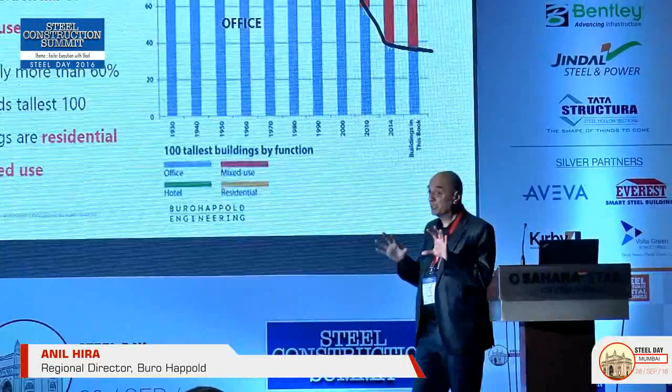The next big shift, and this does affect steel, is that early, before 1990, 10% of the world's tallest buildings were residential and mixed use, whereas the rest were office. And now, more than 60% of the 100 tallest buildings are residential. And what does that mean?

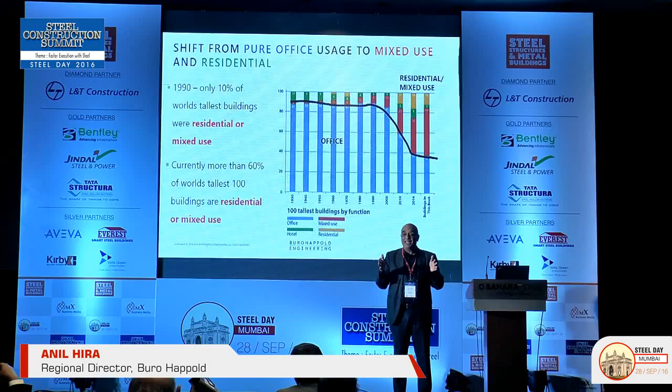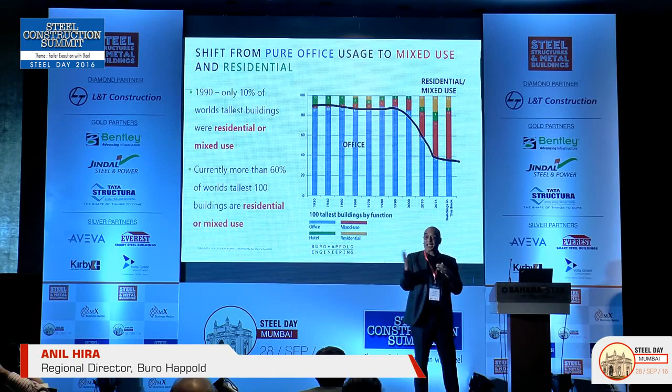Residential tends to be small spans. We want to minimise the floor-to-floor heights. And so that straight away has an impact on whether you use steel or concrete. I'm not saying which is the better answer, but it certainly does influence which way you go.

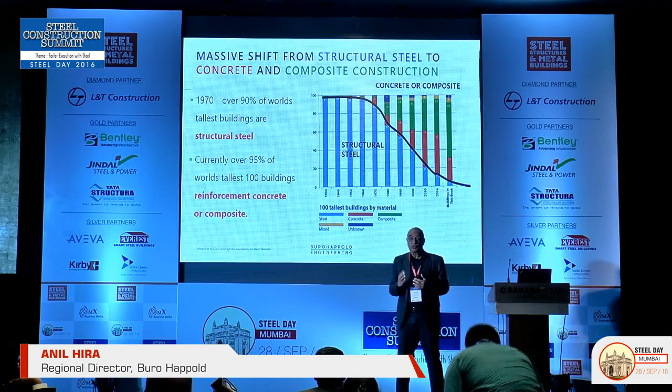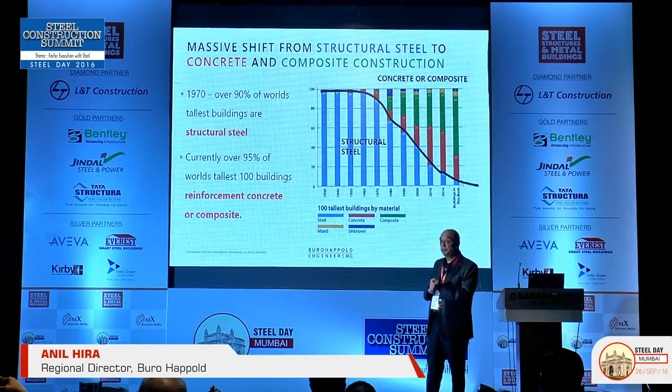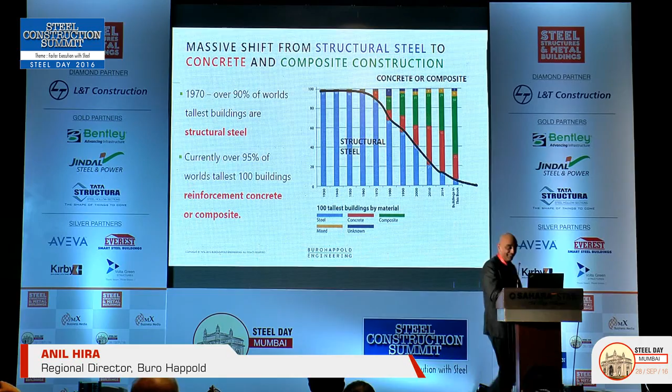And the third one is the massive shift from structural steel to concrete in tall buildings here. Before 1970, over 90% of the world's 100 tallest buildings were primarily structural steel, and now over 95% of the tallest buildings in the world are concrete and composite. And we shouldn't forget that. There are many reasons for that.

Well, why? A couple of things that I can think of is that concrete strengths, even in my career, have gone up from something like 40 megapascal to 140 megapascal. In the country where I come from, Australia, 140 megapascal is readily available, and I've used it for 60, 70, 80, 90-story buildings.

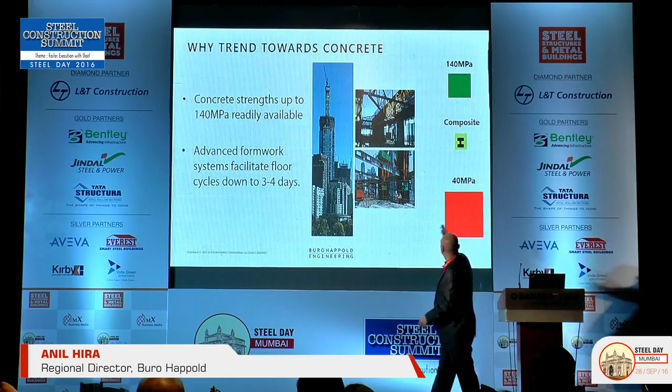And so this gives you a nice layman's diagram: this is what we needed 50, 60 years ago, the red column. Now we can get away with the green column. And composite, well, we've still got a smaller one, but I'm just saying relatively, concrete is improving dramatically.

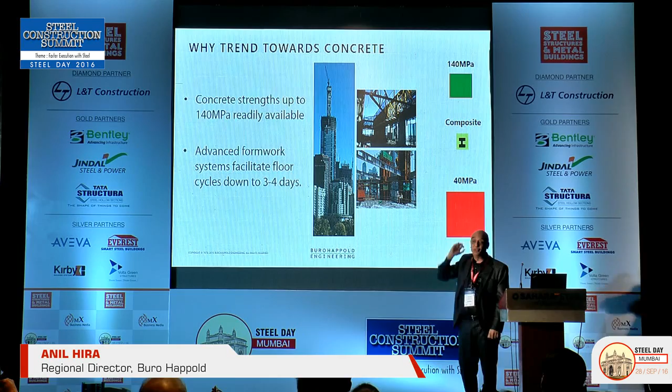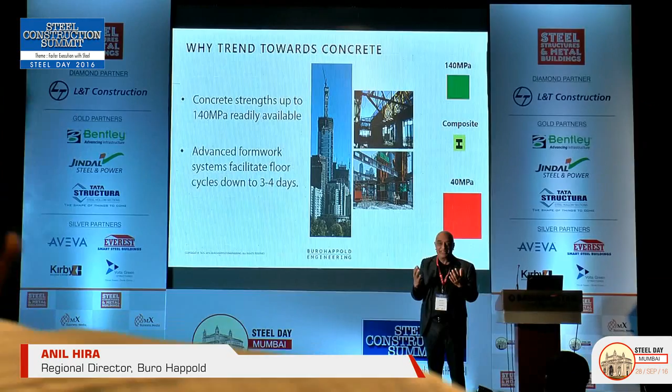And the second big trend in the world is advanced formwork systems. We can have buildings that now climb up very, very quickly. The cores can go up quickly. This particular building, the tallest building in Australia, which I was involved in, that core was going up at 3 days per floor, 6 days double floor. And that's why it's so far advanced.

The reason why it's so far advanced is that we want to get rid of that $1 million advanced formwork, get it off the site and get it onto the next building. And same with the perimeter system. There's only 20 workers on this project doing this infrastructure. The whole perimeter formwork was jacked up on hydraulic lifts, and we're getting 4-day cycles, if not 3.5-day cycles. So they're the two trends.

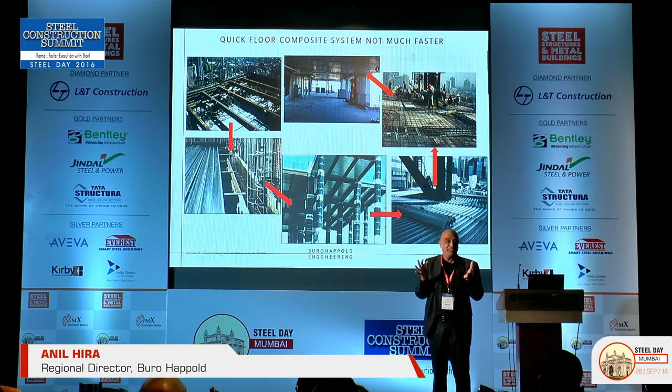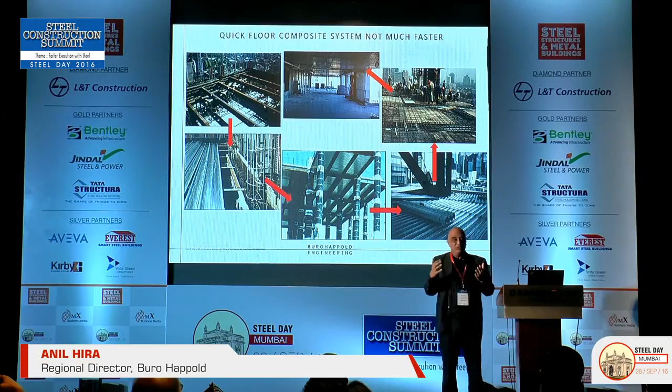So our traditional composite slab, which traditionally is very, very quick, is not that much faster. We should be able to do it in 3 to 4 days. That depends on a lot of factors such as craneage, getting all those members up. So when we talk about structural steel as fast construction, it's only going to be as good as its weakest link, which includes fabrication, transportation, craneage, etc.

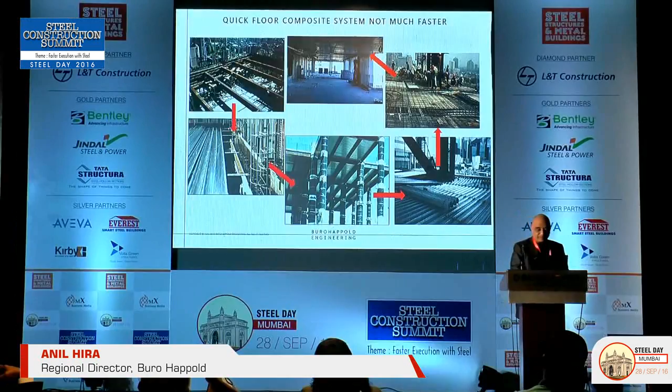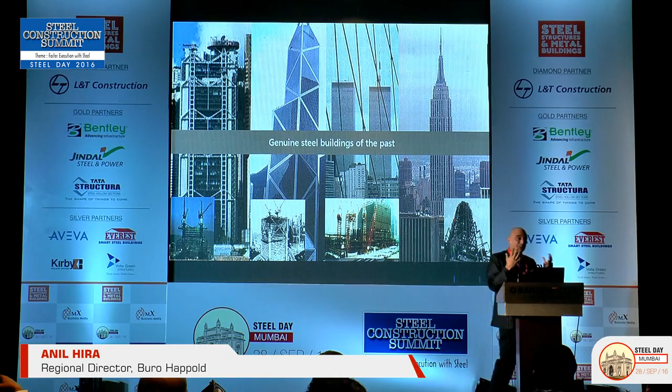So, what is the trend? What's happening now? Before it was structural steel, well, now the trend is composite. This is what was happening 30, 40, 50 years ago, and one of the speakers in the other room just before lunch talked about the Twin Towers, how resilient it was against the events of 9/11.

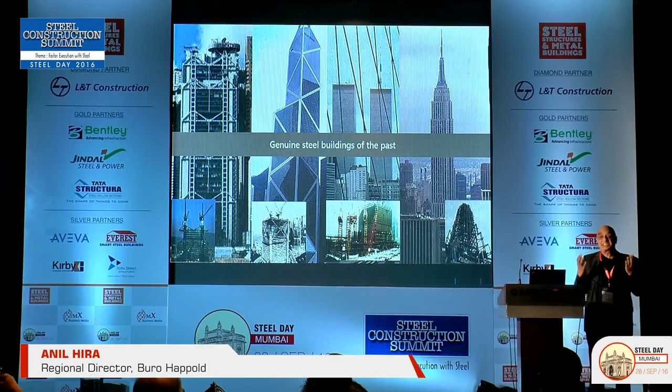Why did the buildings stay up so long? We keep talking about why the buildings came down. I always ask myself, and I know the reason, because I know the structural system, but we should be asking the question, why it stayed up for 1 or 2 hours and let most of the people get out of the building. And there was a lot of robustness to the structure, but it was pure structural steel.

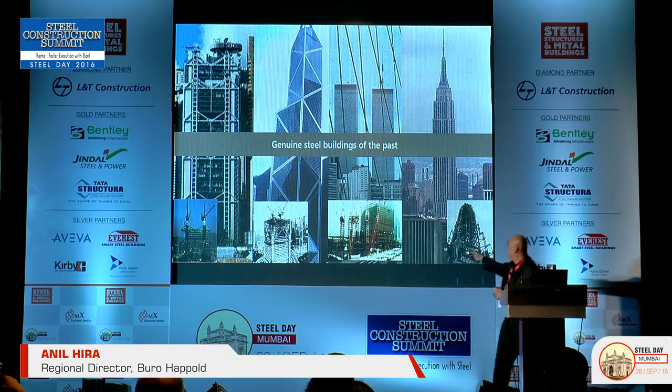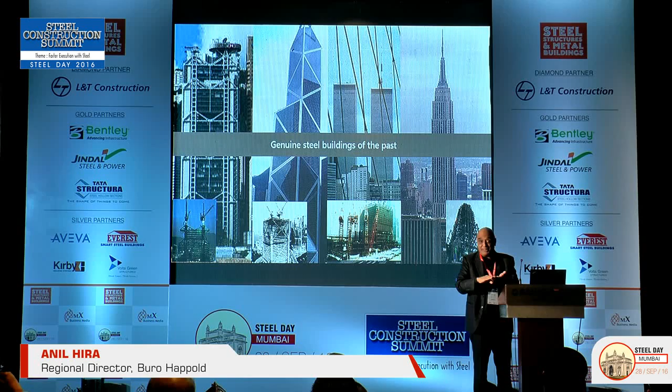So, the present 5 tallest buildings in the world, well, they're all composite, but dominated by concrete. And we shouldn't forget that, it's concrete. Essentially, Burj Khalifa is concrete. So I'm not trying to paint a bleak picture here, I'm just setting the scene.

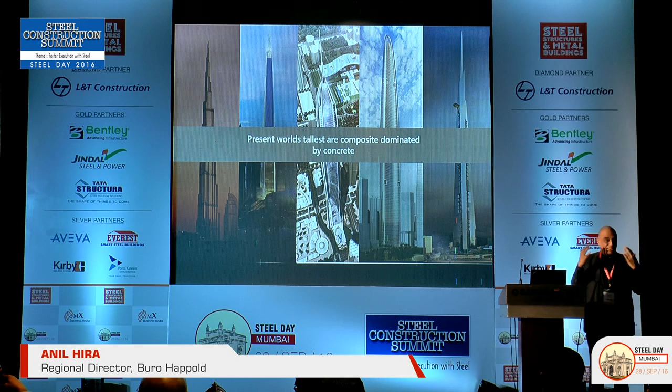And what that means in terms of our steel industry, we need to address how to get more competitive. And we have to address all the parameters, because certainly the owners of these 5 buildings, they've selected concrete. And the reason why is it is more economical, no doubt about it.

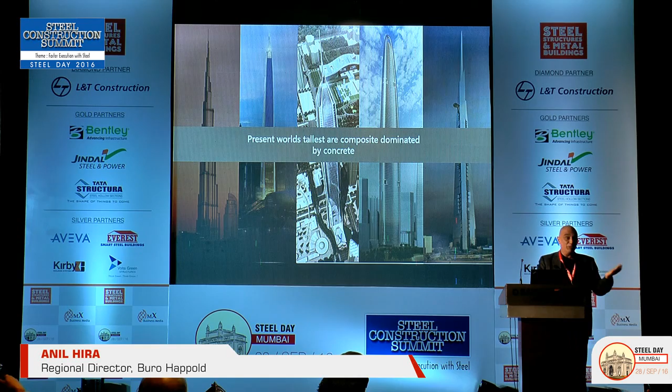So I want to show you some examples of projects that my company and I have been involved in, just to explain why we use steel in parts of the building. This particular project, I was a client's engineer. I wasn't the designer, but I was a client's representative. Dictated the way we want to go. It's called the CMA Tower in Riyadh, Saudi Arabia.

And you can see the columns are going in and out to form a crystal shape. So as soon as the columns go in and out, and Newton's law, physics, the force has to go down, but the columns going in, there's going to be lateral forces. And the lateral forces are either tension or compression. Obviously, when it's tension, we need to use steel.

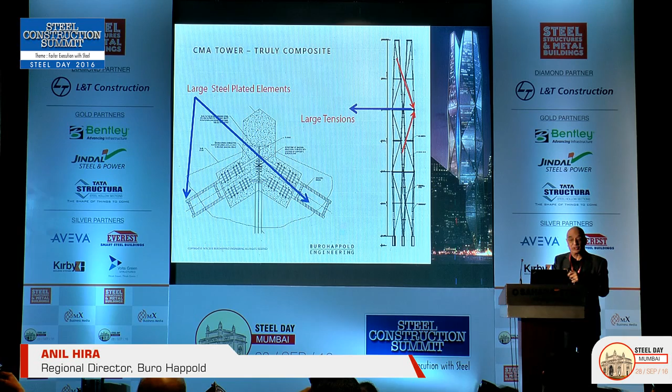And so there were 2 things, the columns were concrete-filled steel tube columns, and there was lots of structural steel in there in terms of horizontal elements that were pulling the columns in to make sure that they don't collapse. So that gives you some vision there of large concrete-filled steel tube columns.

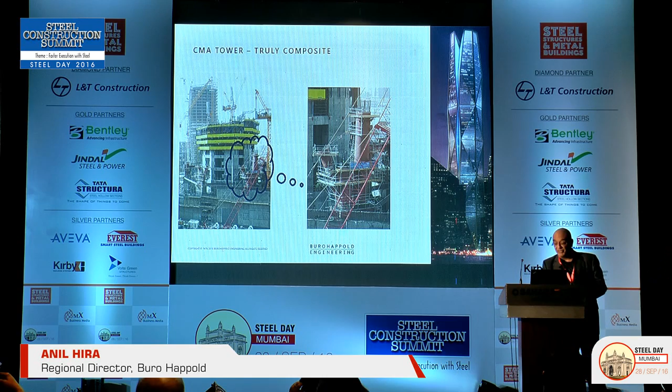And I could give you a whole lecture on concrete-filled steel tube columns, because for a concrete-filled steel tube column, the compressive strength of it is higher than the strength of the concrete plus the strength of the steel, because of the triaxial effect. And for the people that have done soil mechanics, you'll tend to understand why, but I'm not going to give you a lecture here now. But they are very, very efficient, and certainly being applied in North America and Australia.

Very, very impressive. It's great because you can progress the construction without the concrete in the tube for a certain distance, take the construction load, and you can fill the steel tube with high-strength concrete during a non-critical period, so that the building keeps progressing.

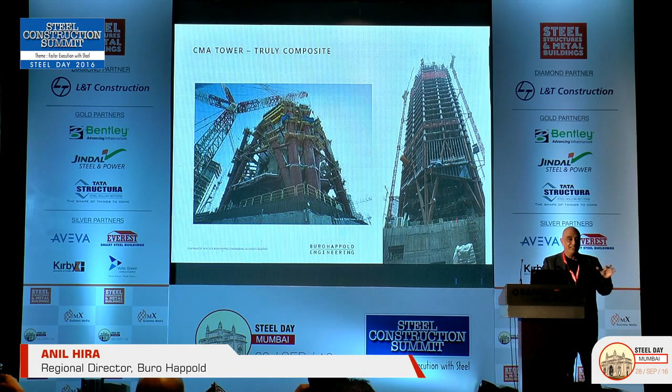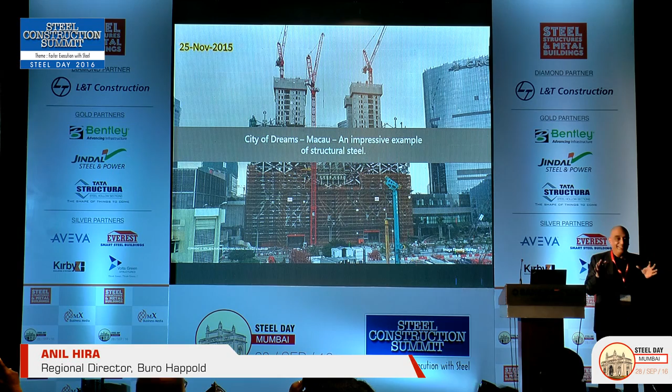This project, another reason why we want to use steel here, well, it's just impossible to use concrete. A typical Zaha Hadid design, and for people that don't know, Zaha Hadid unfortunately passed away just this year. She never liked vertical columns and straight elements. That's a bit of a challenge for our structural engineers. But this was the project, and what you see there is the structural skeleton.

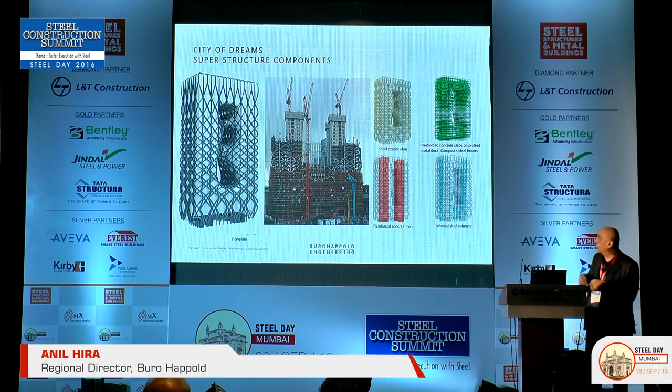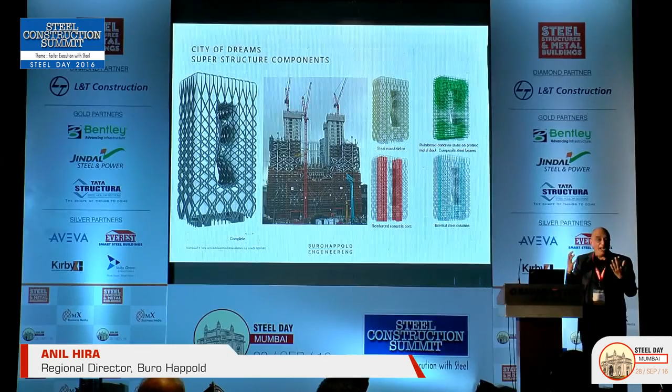It is structural. There are no perimeter columns. There's a concrete core in the middle. Externally, what you see is the structure. So it's almost impossible to have any other material except steel. And why have we got such a complex tower? Because it's going to be a very, very expensive tower. If anyone tries to tell me it's going to be a cheap tower or an affordable tower, obviously you're joking.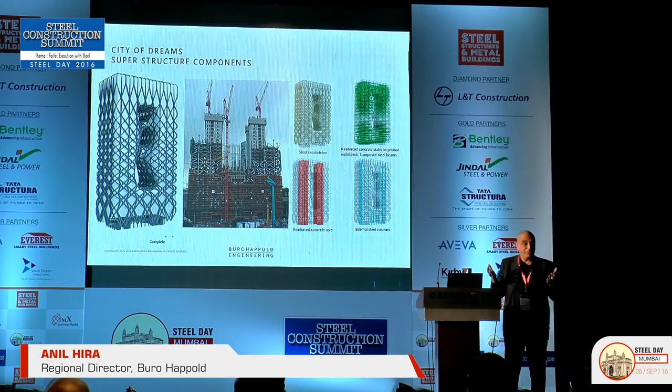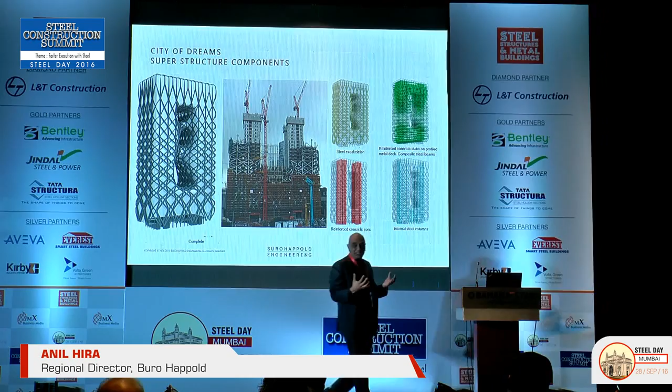But there's something that's based over here that generates a lot of money. It's called a casino. And it's a hotel above a casino, and the cost is peanuts compared with the profit that they make out of the casino to fund this hotel. And so, hence the reason why it's so complex. It's going to be an architectural feature, and it's going to dominate the Macau skyline.

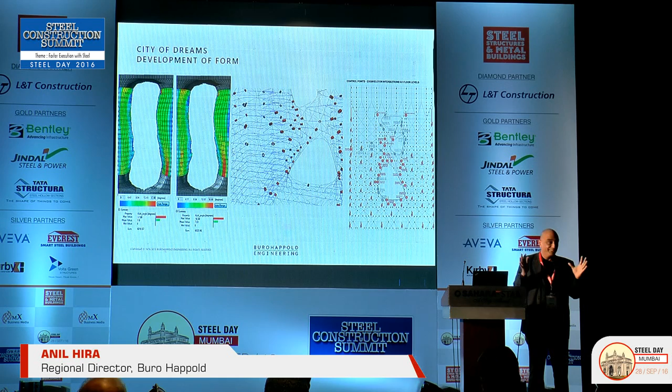The only reason we can do this now, and hence why we can be creative with our structural steel, is because we've got digital engineering. From geometry, we can convert to finite element models with the joints and analyze it all at the press of a button, as long as we program it. It would be almost impossible to design this 10, 20 years ago. We can do this now because of digital engineering.

I was going to, let's just see if I can show a video. It's not going to work, I don't think.

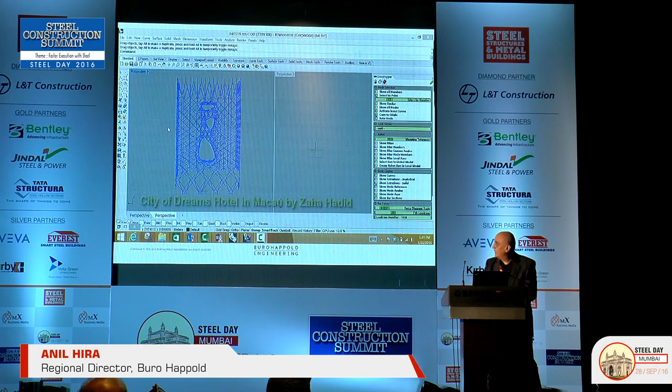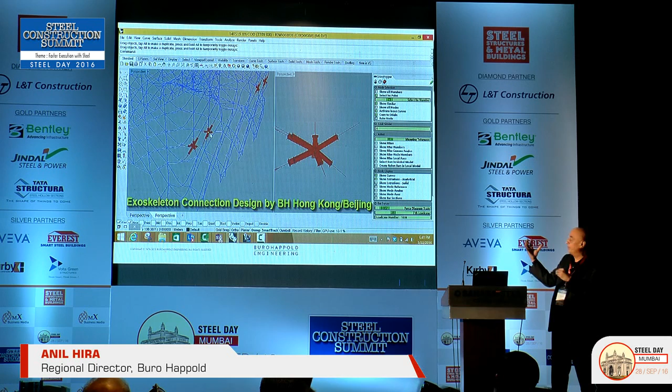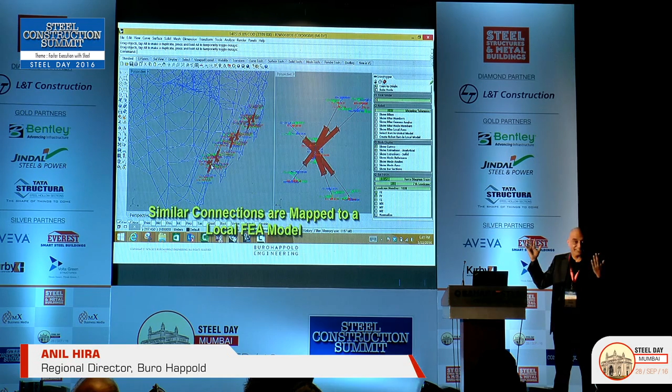Yes, it is. So this particular project, you get the geometry from the architect, and automatically we can go from the geometry, using Grasshopper and Rhino, into a finite element model, and then analyze it for all the different load cases at the click of a button. So even if the geometry changed, we can automate the whole process, which only takes a few hours to run, to basically analyze all the joints.

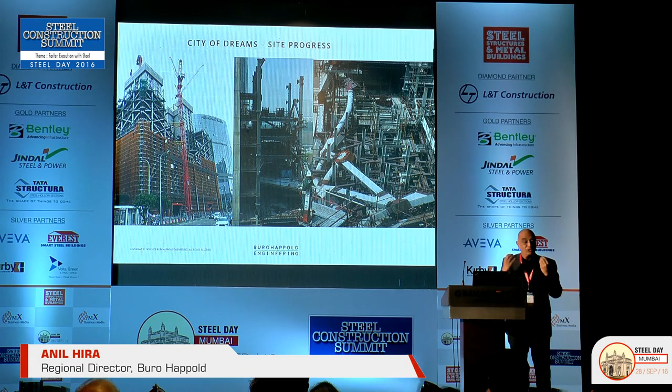So just some pictures of the complexity, and just shows you the versatility of structural steel. Because we can define it now through digital engineering, it's so easy for the fabricator, so easy for the structural engineer, because we can define it through digital engineering.

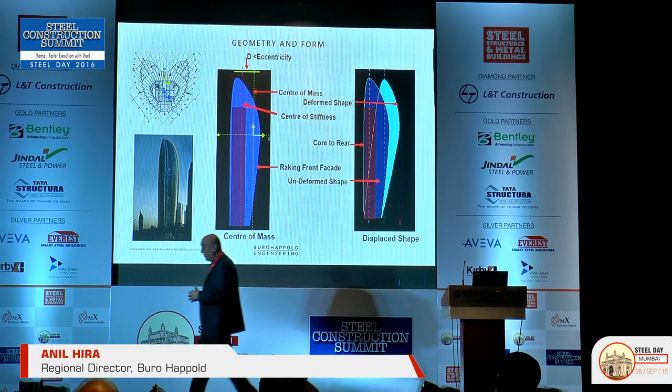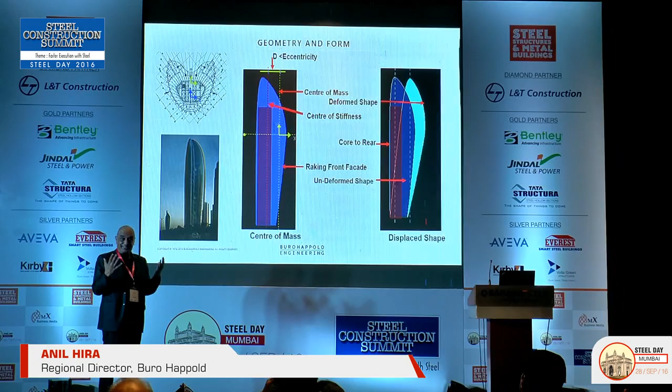The National Bank of Kuwait, that's another interesting project, very, very expensive. The reason why it's very expensive is because it's the headquarters for the National Bank, and they can afford to pay a little bit of penalty to market their building as that iconic structure that symbolises the bank.

And this whole building, for the structural engineers, is highly eccentric. So the building wants to tilt over, the stiffness compared to the centre of mass. And of course it's concrete, the core is concrete, so it wants to continue to creep, moving over time, and so we needed to have structural steel to minimise that tilt and to predetermine some presets.

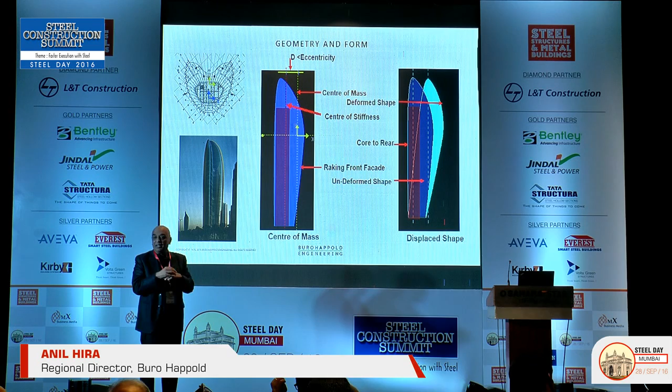So we tilt the building the other way, so over 30 years it will not straighten, but it will tilt the other way, but we're compensating half of the deflections. So quite complex, but we had to use structural steel to minimise that tilt.

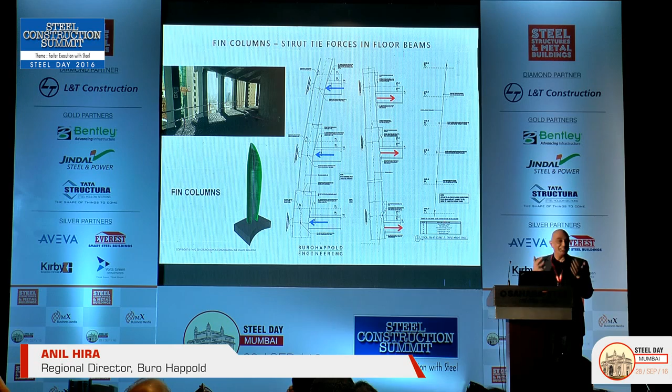Because the columns are curving, obviously push-pull forces, when it's curving downwards, you've got tensions on the slab, and so the whole thing, the out-of-plane forces were all taken by structural steel within the floor frame. And so structural steel was the only answer. There was no other option.

Just to give you some more images of the floor plate, composite with the steel tube columns. So everything is structural steel except for the floor slab and the concrete core. Some more images. In fact, this is about 1.5 years out of date now. The building is almost topped off.

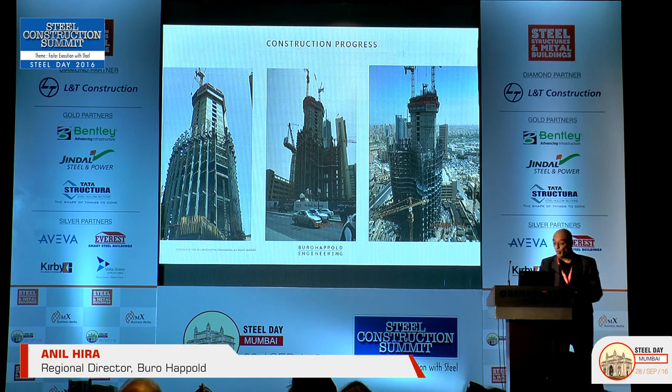The next project, very quickly, is a project that I was involved in nearly 35 years ago. It's called Market City. And I only got one slide here, but why did we use structural steel here? The reason why we had structural steel is that it's a very complex project.

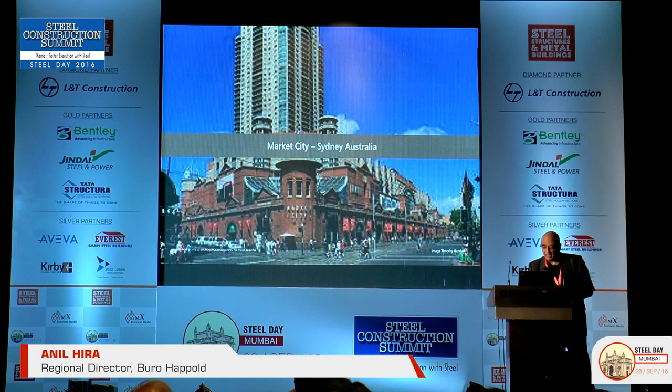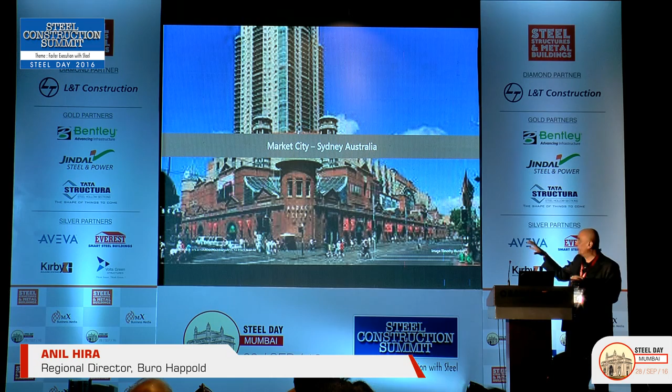If I go to the previous slide, there's a market, movie theatres, shopping centre, vegetable market, fish market, meat market, in the basement areas. Very, very complex, and then the building on top of that. And so we needed to build this very quickly. These are the days when the interest rates in Australia were 18%, and the developer wanted to get this built as quick as possible.

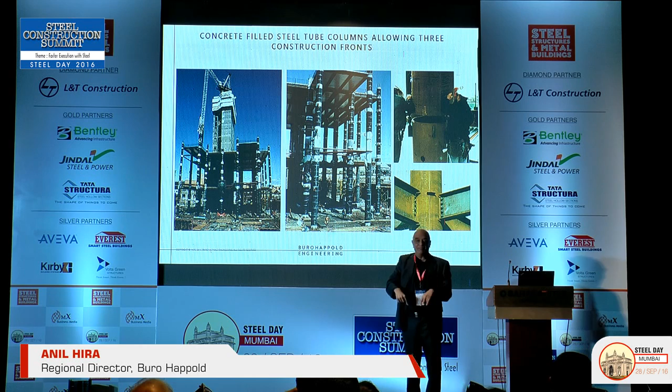So we wanted to get off the foundations, steel tube columns, quickly up, and so you can see the concrete core is shooting up, virtually we go 20 stories above the floor, and we want to get a working platform where you start your typical floors. So there are 3 construction fronts, one right at the top, one in the middle, and one at the base. Theoretically, everything gets finished on the same day.

And so the whole building was completed in virtually 2 years, whereas if you started from the base and worked your way up, 3 to 4 years. Once again, only possible because of structural steel. That was the only answer.

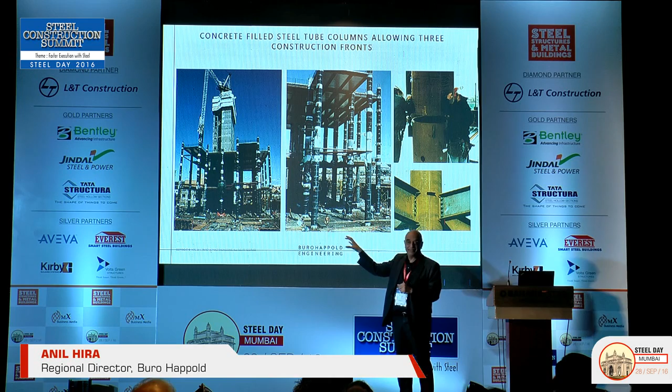Okay, getting pushed here, 5 minutes.

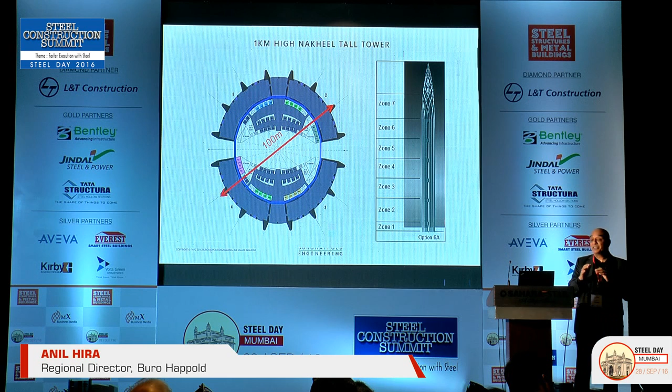Okay, Nakheel 1 kilometre high tower. This is a project in Dubai, I've got the title there, Victim of Global Financial Crisis. It didn't get built, but that's only half truth. The foundations did get built. About 170 million US dollars worth of foundation is buried under the sand in Dubai. And I designed the foundations, I'm proud of that.

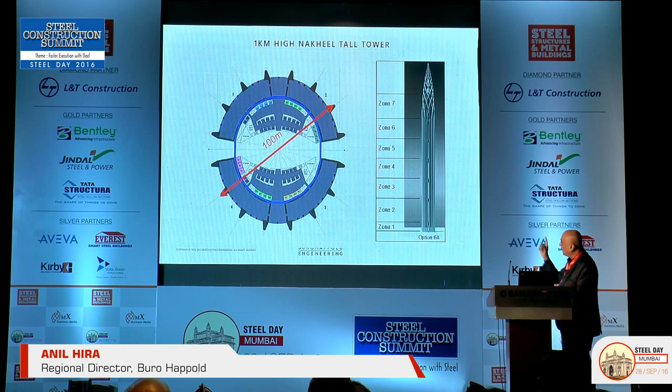100 percent concrete structure again. However, lots of steel. And just some of the examples. Because the spans between the mega columns are 22 metres, we had internal columns in between the 2 big black blobs, and that had to get transferred every zone where you've got this band beam here.

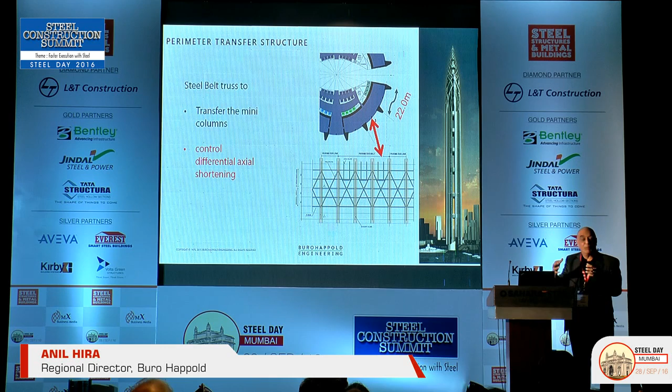And at that band we had steel truss. And the reason why it's steel is that the concrete just kept on going, and the steel elements were built in non-critical periods. So lots of structural steel there. Secondly, when the wind blows, there were 4 quadrants and they were connected by these link beams.

And those link beams had to be in steel, simply because we're trying to transfer 200,000 kilonewtons. If you don't understand what 200,000 kilonewtons is, it's equal to a small ship. Now the force that goes across that, and concrete, well, the shear forces are so excessive that we have to have steel. And so tons and tons of steel in all those link beams.

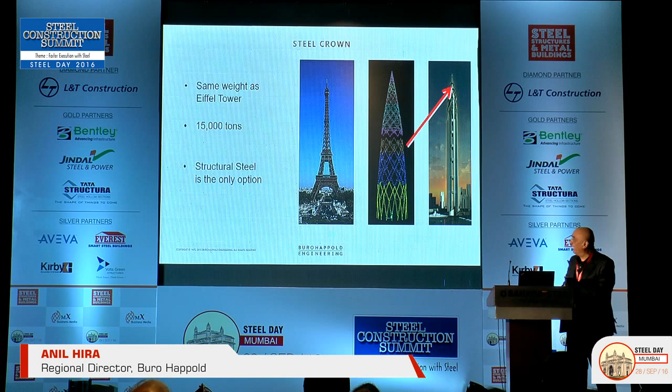The top feature, even though it looks small, that top feature, the roof feature, is the same weight as the Eiffel Tower and virtually at the same height as the Eiffel Tower. It's 1 kilometre high. You can see the top 200 to 300 metres was structural steel. And so once again, structural steel is the only answer because of the geometry and it will minimise the weight.

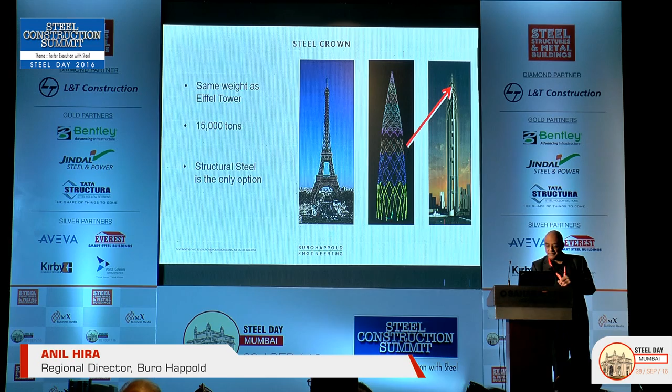And then lastly on the Nakheel Tower, in these zones there's plant rooms that span across that whole central void, 3 or 4 stories of it, and that had to be structural steel. And that was dictated not by weight; it was all to do with buildability. How do you build that platform up in the air?

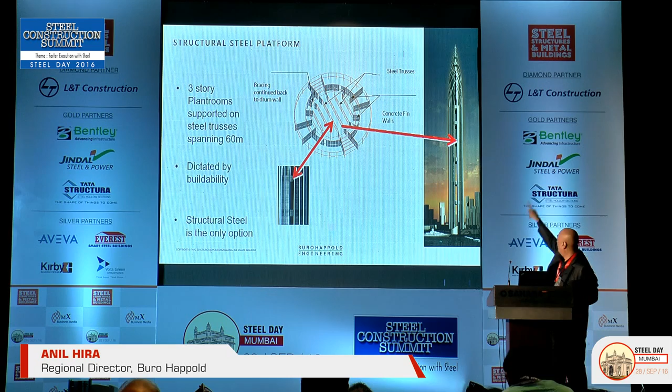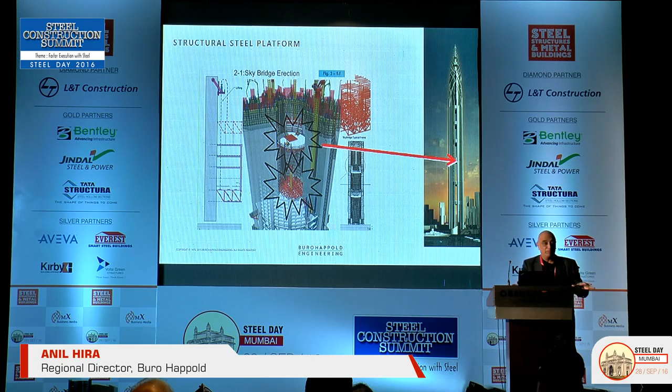So the next diagram shows you that the whole structural steel framework was all constructed at the base, and then it was jacked up, a bit like the previous slide. Top-down construction, the whole thing was built in the base, and it was all jacked up to build those platforms. The future.

I've sort of painted a bleak picture for steel, but you can see that we do have lots of steel application. But where are we heading? Well, we go back to Henry Ford, building your cars, where one person does one activity, but does a damn good job of that one activity. Becomes very, very good at it. And that's where we're heading when it comes to buildings. We're going to be building elements in the factory, and they're just going to be installed very, very quickly.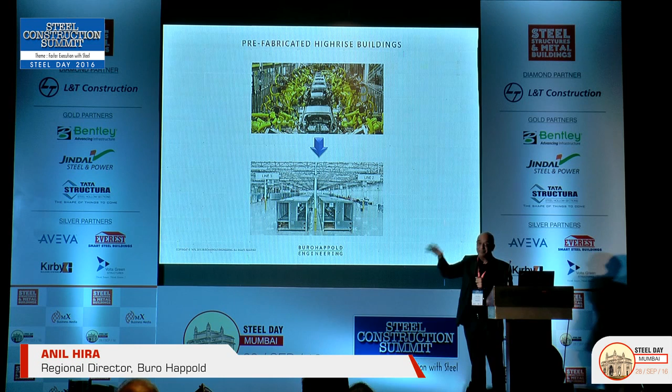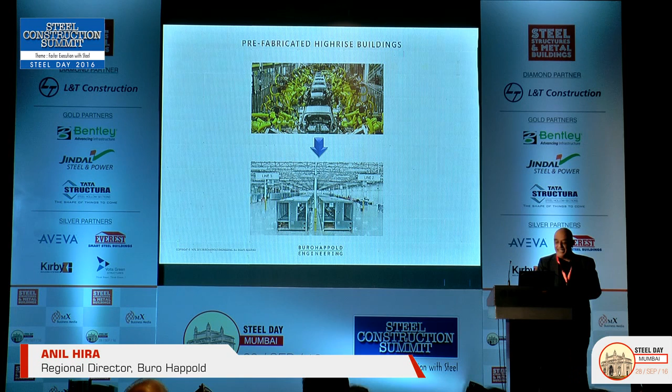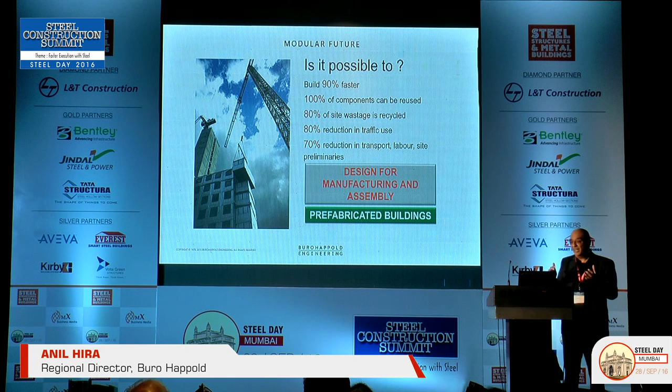And this is going to happen in India. That's my vision. It has to happen in India because we seriously need lots of buildings at an affordable price, and it has to be flexible, it has to be quality. People are going to be after quality, and so I think it's going to be built in a factory, and it's still going to be plonked on site, and it's going to be primarily steel because of its weight, versatility, and flexibility of manufacturing.

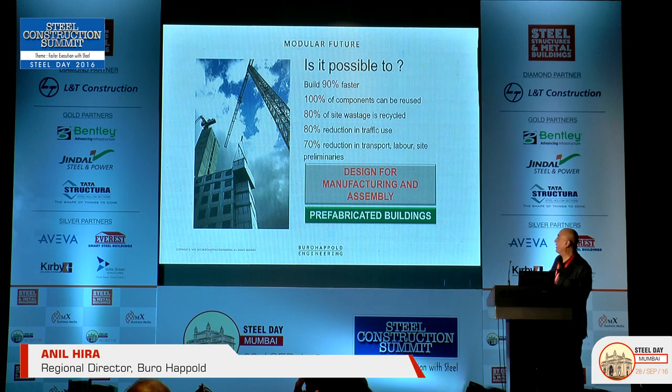In Melbourne, where I come from, the questions are being asked by particular companies and research: we want to build 90% faster, 100% of the components can be reused, sustainability, 80% reduction in traffic use, 70% reduction in transport, site, labour. How do we do this? It all comes to prefabricated buildings.

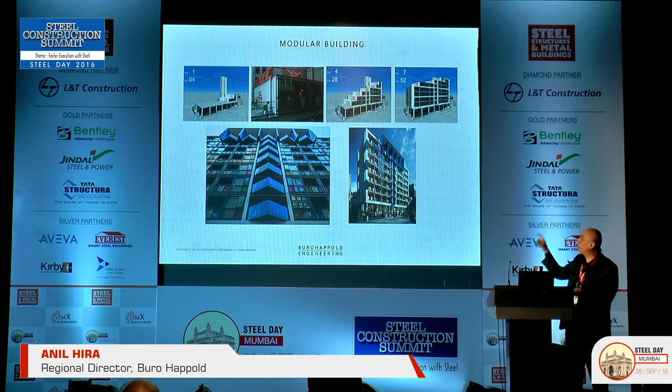This is a real building in central Melbourne, which has hardly any access, off one of these small laneways. It's not a big building, but it was built in virtually 2 to 3 months. 2 months. And that's where we're heading. Primarily, it's going to be structural steel. So, the last slide.

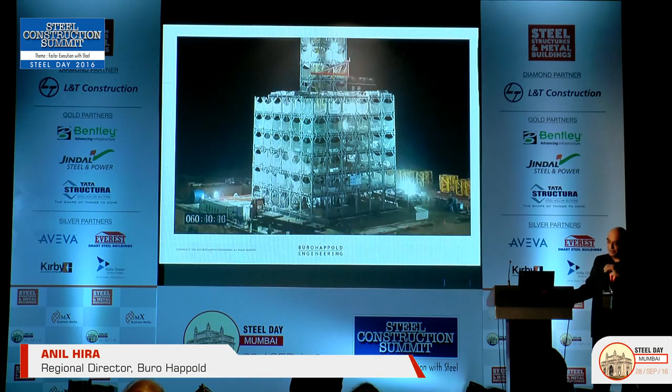Just have a look for 1 minute, because this is where we're heading. This is not a 10-story building. China, I think it was a 30, 40-story building, and they're already doing a 150-story building. And this is where it's all heading. And I'm sure this sort of technology is going to come into India in the next 10, 20 years.

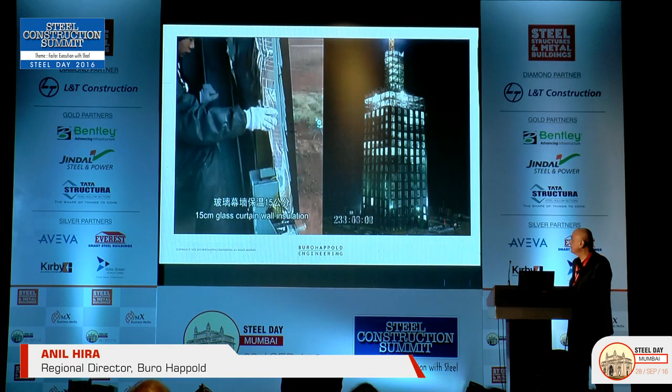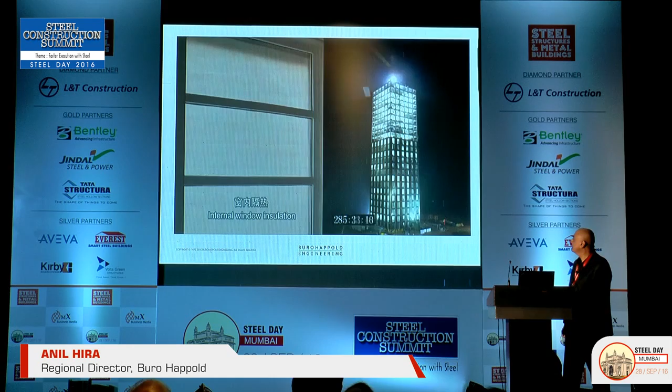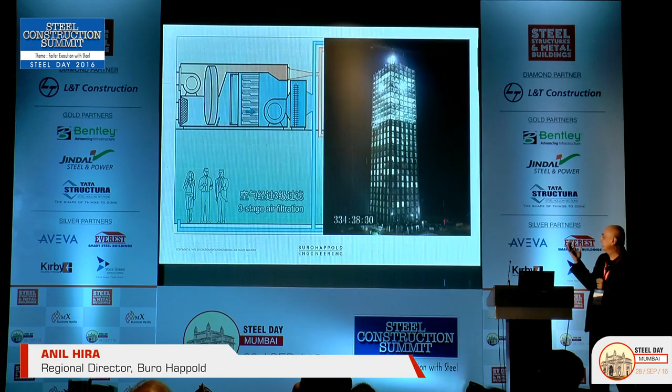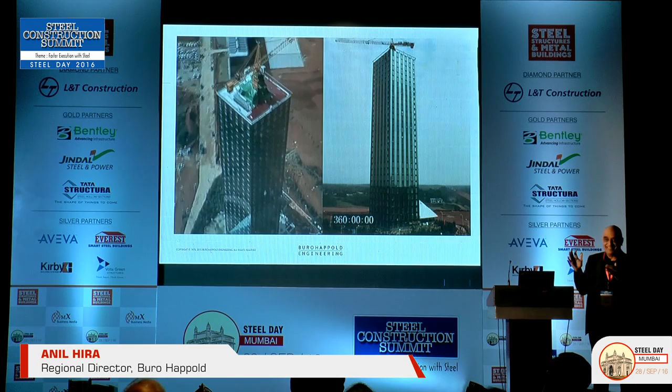So obviously there's a lot of R&D that's gone behind this building. So even though it was built in I think 3-4 months, they spent billions of dollars, but it's the R&D, the research going into where the future is. And this is where I think it's going to be heading in India to meet the demands of 400 to 500 million people that are going to move from rural to urban in India in the next 30, 40 years due to that migration from rural to urban and due to natural population growth.

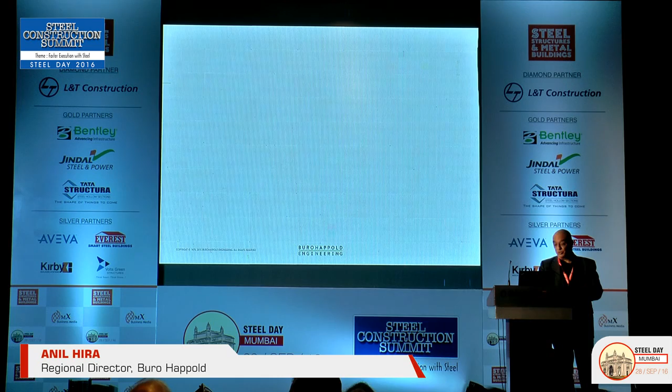So I expect that steel is going to be the answer, certainly going to have a major play in the answer to meet the demands of urbanisation in China and India, and hence the reason why we are here, I think, and why some of the steel companies are going to be investing a lot of money, and certainly should be investing a lot more money to compete with concrete, because concrete are going to be doing the same research in terms of meeting these demands. So I think that's it.